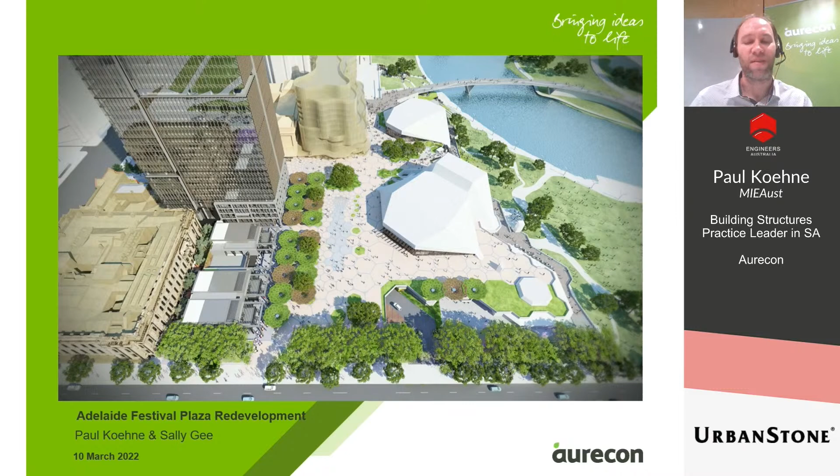So what are we going to cover today? The Aurecon presentation is split into two halves: the first being a project overview, and the second half being more engineering related, where we'll go into some of the specific details and challenges on the project.

I'll start with an overview of the wider Riverbank Precinct master planning, including some of the recently completed buildings, those under construction, and future buildings.

We'll then touch on the existing precinct conditions and talk about some of the complexities and intricacies of the precinct. After that, we'll touch on the architect's vision for the precinct. I would like to spend a bit of time looking at the precinct staging, including our innovative engineering-led design which enabled the vision of the precinct to be realised.

The second half will focus on some specific engineering-related project challenges, including existing structural conditions, strengthening of old structures, working with limited existing structural drawings, dealing with the multitude of unknown and latent conditions, and finally, how we overcame these to assist with the delivery of the overall master plan.

Adelaide's Riverbank Precinct lies immediately north of the Adelaide CBD. The location and character of this area is considered a critical element in the layout and makeup of the city of Adelaide. In particular, the Riverbank Precinct provides an important link between the city and its picturesque river environment.

The precinct is made up of several key precincts, including the Innovation Precinct, the Entertainment Precinct, the Health Precinct, Cultural Precinct, Waterfront Precinct, and the Sports Precinct to the north, which is home to Adelaide Oval and Memorial Drive. In 2011, ARM released the Riverbank Master Plan, which focused on the revitalisation of Adelaide's core Riverbank precinct.

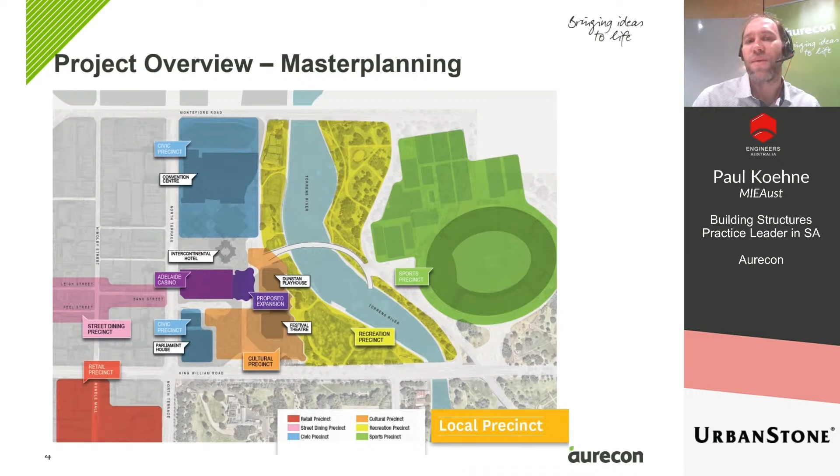For me personally, my journey in the precinct started in 2008 with SAHMRI, then straight onto the footbridge, and then to project leader for Sky City Casino and the Adelaide Festival Plaza redevelopment.

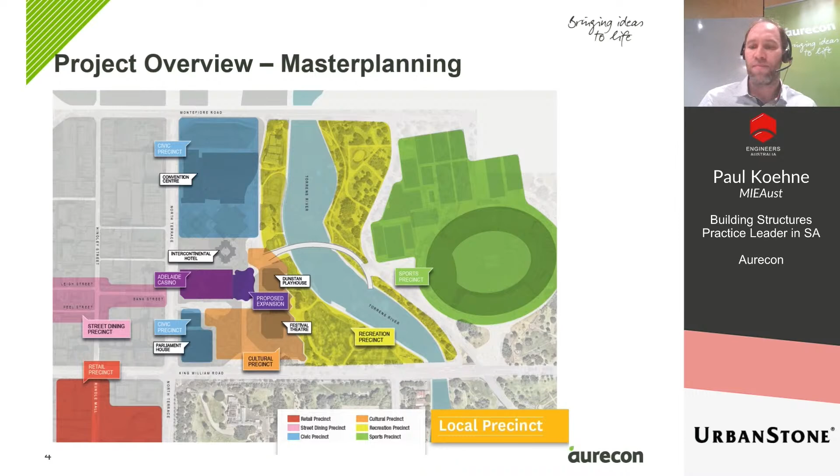It's home to some of Adelaide's most significant buildings, including the Adelaide Railway Station, Parliament House, and Adelaide Festival Centre. The existing plaza surrounding these buildings is considered old and dated, dilapidated, leaks like a sieve, and is mostly an unused, desolate area. The existing site is also home to several major loading docks, including Adelaide Convention Centre, Sky City Casino, commercial tenancies within the railway station, Intercontinental Hotel, Festival Plaza, and the Dunstan Playhouse.

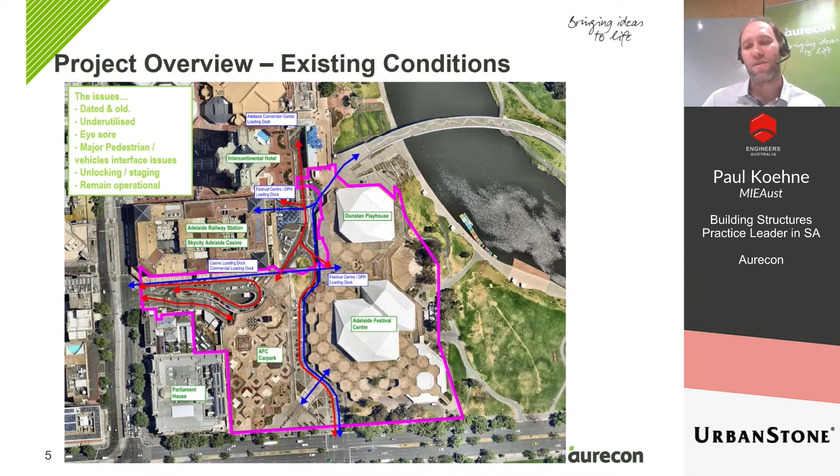You can see them highlighted in the green text. I haven't shown them all, but the red lines show some of the key traffic movements, and the blue lines show the key pedestrian movements. What's important to note is that the blue and red lines are intertwined, which is demonstrating the unfavourable, unsightly and unsafe constant interaction between road users and pedestrians.

I touched on this on the previous slide. Since construction of the Adelaide Railway Station in the 1920s, Adelaide Festival Centre in the 70s, and ASER in the 80s, this area has been constantly plagued with non-stop conflicts between road users and pedestrians. It's hard to create a pedestrian-friendly, thriving hub when a vast area of the plaza is covered with unsightly asphalt roads and loading docks.

To give an example, the Riverbank footbridge opened in 2014 and is a major pedestrian connection between the Adelaide CBD and the northern banks of the Torrens River, home of the Adelaide Oval and Memorial Drive. Yet to access the city or the railway station, pedestrians have to walk straight through the Intercontinental Hotel loading dock. During major events at the Oval, when up to 60,000 patrons will walk across the bridge, Festival Drive is closed from road users. What this means is all loading docks and car parks are completely cut off and inaccessible for up to 5 hours at a time.

This is clearly not a functional long-term solution. Similar issues were occurring throughout the precinct, including Sky City's casino main entrance, which is also used as a temporary and valet parking as well as a pedestrian thoroughfare. Similarly, again, the front door to the world-renowned Adelaide Festival Centre was accessed by crossing a road that was frequently trafficked by car and loading dock users.

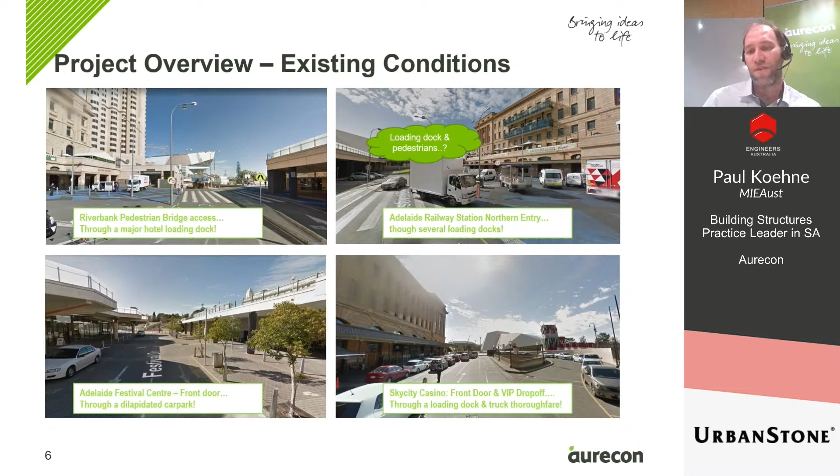We can go on forever, but you can start to get an appreciation for the precinct issues and the engineering challenges that we had to overcome.

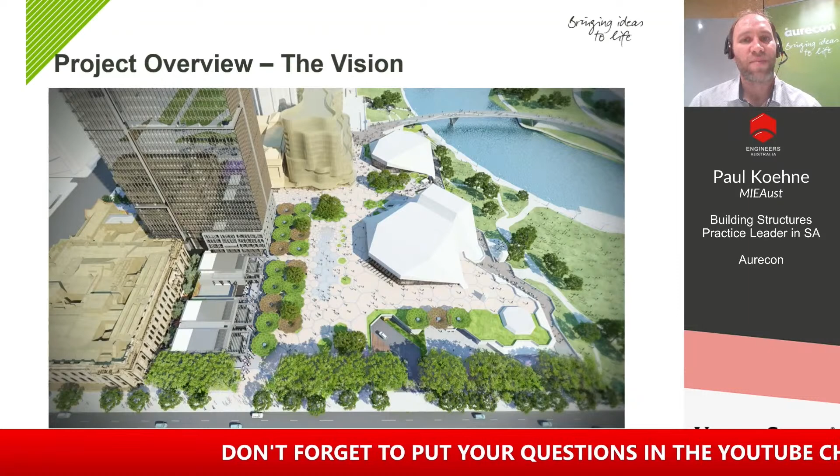So what was the vision? This image is courtesy of ARM as part of their early concept designs for Festival Plaza. I should caveat my summation of the vision with: I'm an engineer, not an architect.

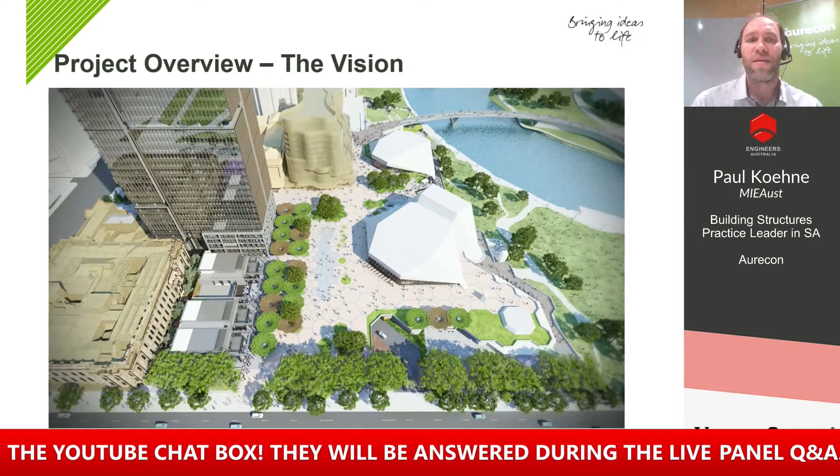The key vision is for a vibrant, thriving riverbank precinct, an area where people will not just pass, but will stop and congregate, a destination in itself. But people don't just stop for no reason. So the long-term vision included retail shops, shaded areas, seating places, interactive play areas and water features, and of course, direct access through to the picturesque Torrens River banks.

It must also be capable of hosting major events such as concerts, fringe shows, and New Year's Eve parties. As part of the project, the main entrance for the Dunstan Playhouse and Adelaide Festival Centre are also being raised to the upper level, with all road users and loading docks travelling below the plaza. This vision also therefore provided separation between road users and the public.

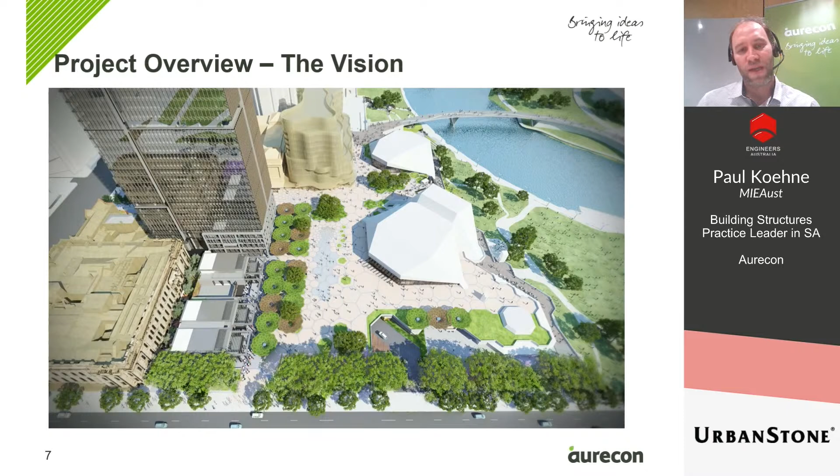So let's get into detail. The following pages are the staging plans for the Adelaide Festival Plaza redevelopment that was submitted as part of the 2015 development approval application. The first stage shown above was twofold.

Stage 1A is what was referred to as AFC Early Works or grade separation. As the name suggests, it relates to the first and most critical stage of separating vehicles from pedestrians.

Stage 1B was focused on revamping the northern face of the Adelaide Festival Centre to provide the critical connectivity to the Torrens River, but most importantly, relocating entrances of the theatres to the northern promenade to enable construction on the southern side. I've intentionally referred to the first stage as unlocking the precinct, as completion of these works were paramount to enable all other works on site to commence.

The loading docks were typically accessed from south and east entry points, both of which needed to be temporarily or permanently closed. But we also couldn't shut down loading docks for 5 years during construction and cripple the precinct and the businesses within it, particularly when many of the loading docks operate 24/7, 365 days a year. And the precinct included Adelaide's largest public transport hub, which transports tens of thousands of commuters daily.

We needed a complex, innovative, and engineering-led solution that could convert access to the precinct and the loading docks to the west, while simultaneously maintaining uninterrupted access to the loading docks, enabling continuous pedestrian flow through the precinct, and creating grade separation between pedestrians and road users.

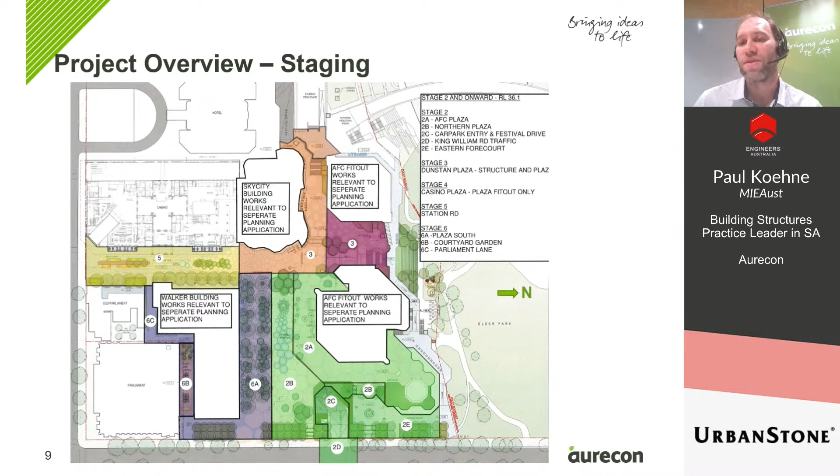Stage 2A, Stage 2B and 6A represent new plaza that was constructed concurrently with and above the Walker structure. So how did we do Stage 1?

The Intercontinental Hotel loading dock needed to stay in its current position, and so did the northern entry to the Adelaide Railway Station. So we came up with the idea of constructing a new basement adjacent to the railway station and within the railway station itself.

The basement had to be partly constructed within the railway station for two reasons. Firstly, so that we did not impact the long-term operations of the Intercontinental Hotel, and secondly, so that we could maintain continuous thoroughfare for pedestrians exiting the railway station into the Riverbank Precinct.

The idea was not originally supported, but there wasn't many options, and through clever engineering and carefully considered construction sequencing, we were able to demonstrate to DIT, the stakeholders and the builders that this was possible. There was also a very stringent dilapidation survey undertaken prior to commencement of works and strict ongoing survey monitoring to ensure that the existing heritage structures were not damaged during construction.

We also had to negotiate with the Adelaide Convention Centre to allow the Intercontinental Hotel to temporarily share their loading dock for 12 months and create a pathway through the ICH loading plant room for safe, clean and hygienic transfer of the Intercontinental Hotel goods and services.

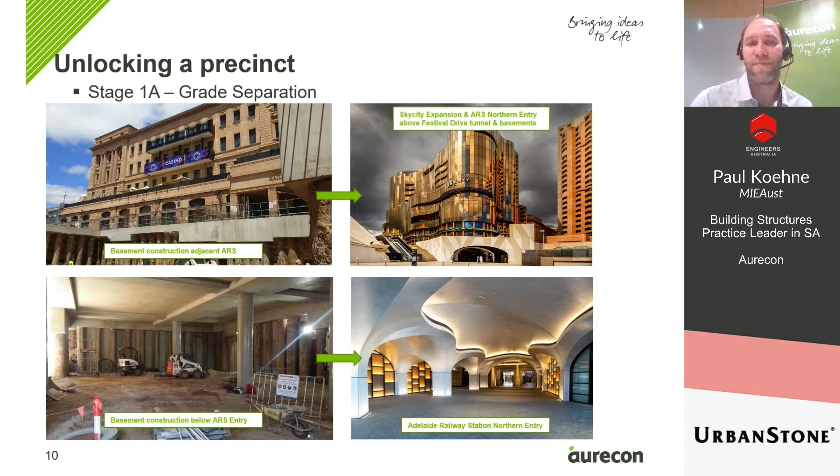Thanks, Paul. As Paul mentioned previously, the aspiration for the project was for a vibrant, thriving riverbank precinct, an area where people would not just pass through but stop and congregate, a destination in itself. It was also to be capable of hosting major events such as concerts, fringe shows, and New Year's Eve parties.

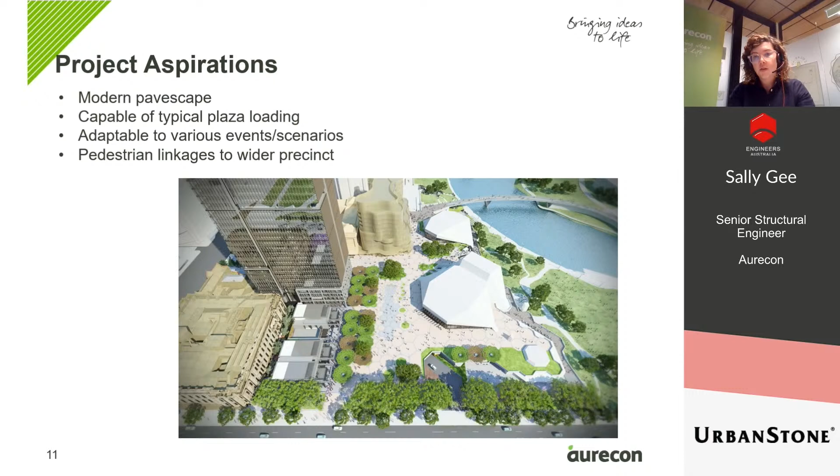Aspiration, coupled with an existing nearly 50-year-old ageing structure, came with significant challenges, as you can imagine. In effect, we were trying to take this and make it into this.

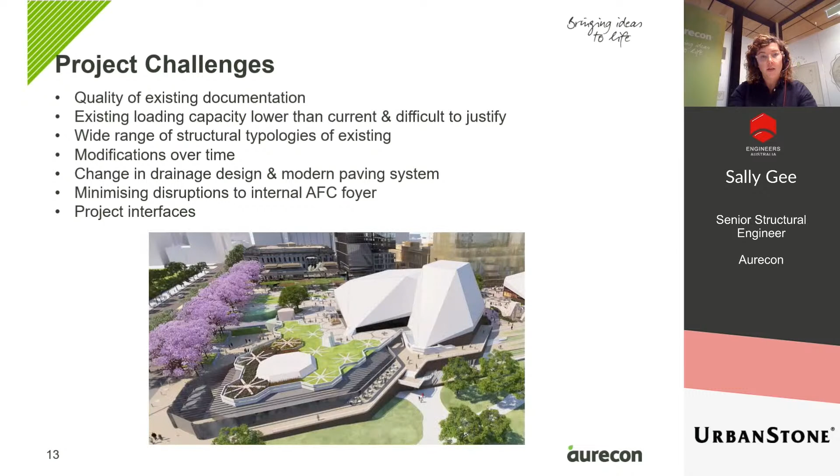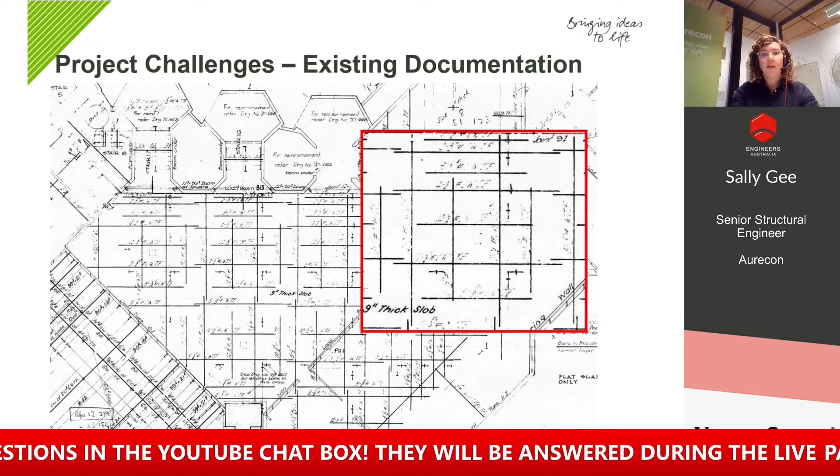One of the first and ongoing challenges was the level of existing documentation available to us. These were the original structural drawings for the project. We had access to those, however they were scattered, scanned from microfilm, incomplete, and to varying degrees of readability. In addition, there had been several modifications to the structure over the years which were not well documented.

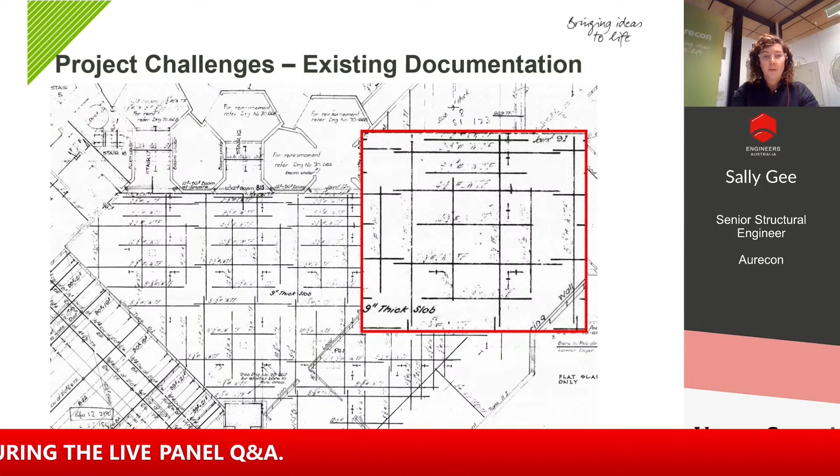So we combated this in several ways. Firstly, we got very good at deciphering little black blobs into marks, which could be 3/8-inch rebar marks and similar. We also used our extensive knowledge of the site to understand where modifications had occurred from the original documentation.

We used a series of historical reinforcement guides and engaged Adelaide University to undertake material testing on both the concrete and the reinforcement to validate our assumptions. And we did what all engineers do in these situations, which was make appropriately conservative engineering judgments based on the information we had to hand.

This is just a snapshot to show the level of documentation we were dealing with in many instances. You can see the text is very unclear, and it was quite hard to decipher what the reinforcement was in many locations.

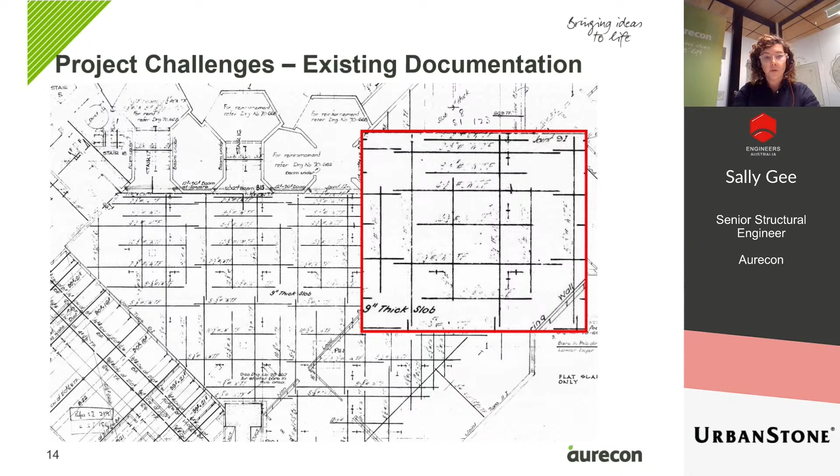Unlike lots of projects of this nature, we did actually have an original loading diagram for the plaza, which stated a loading equivalent to 3.83 kPa. The drawing doesn't stipulate whether this is dead or live loading, but it's also much lower than a modern plaza would be designed for these days, which at a minimum would be 5 kPa, and more likely 10 or more.

To allow for vehicles and event setup scenarios to occur, however, despite having the loading plan, we still needed to validate this, both to verify the loading against the structural drawings we had and also determine whether we could justify a higher loading. Even without the live load, there was still a significant superimposed dead load being proposed to account for the modern Pavescape design, including the paving build-up itself, which alone was 2 to 2.5 kPa, as well as extensive landscaping, seating, shading devices, lighting, etc.

Upon detailed analysis of the various structural elements making up the plaza, which I'll go into more detail shortly, it became clear that in several areas we couldn't even justify the existing structure for the documented live loading, let alone higher, or the 100 to 200% increase in the superimposed dead load from the original plaza.

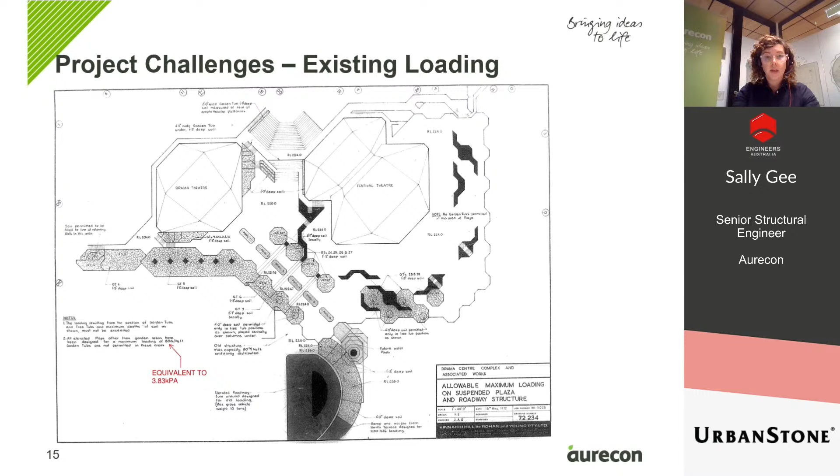To take a step back, I want to walk through the sheer number of different structural types we needed to analyse and determine the existing capacity for. Here you can see the extent of the existing structural elements being retained as part of the new plaza.

We had an array of different structural types, including long-spanning two-way waffle slabs, with two-way spanning beams of up to 15 to 18 metres long in each direction at approximately 3 metre spacing, with thin 100mm slabs in between.

There was a section of long-spanning steel composite slab with beams spanning approximately 24 metres. This slab was located over the Space Theatre in the Dunstan Playhouse and is a two-layered structure, as you can see in the snapshot, allowing for acoustic isolation between the structure and the surrounding elements for that theatre space below.

There were areas with thin 100mm to 130mm thick slabs over closely spaced, long-spanning, passively reinforced concrete beams up to 18 metres long. Each beam was individually reinforced with bespoke bar curtailments and stirrup arrangements, meaning each had to be assessed separately. There was no ability for bulk batch analysis—each beam had to be assessed on a case-by-case basis.

There were areas with thin slabs over internal load-bearing blockwork walls, and these were perhaps the most modified spaces over time, with internal walls having been demolished and replaced with either walls in slightly different positions or load-bearing beams and columns, which we needed to verify on site.

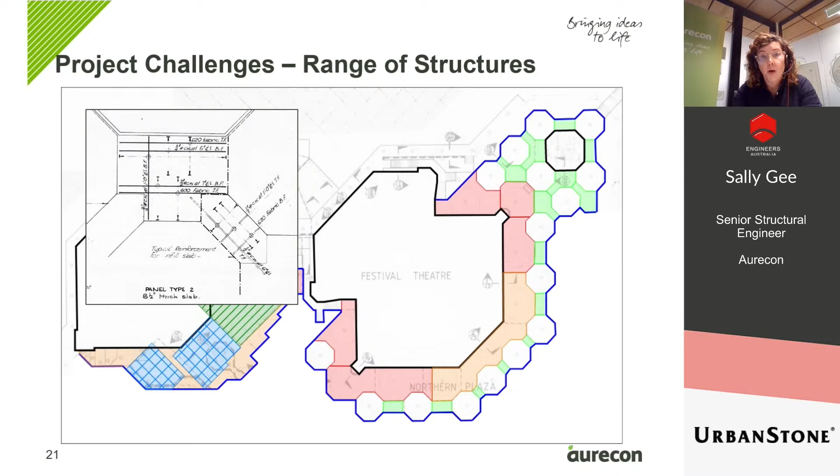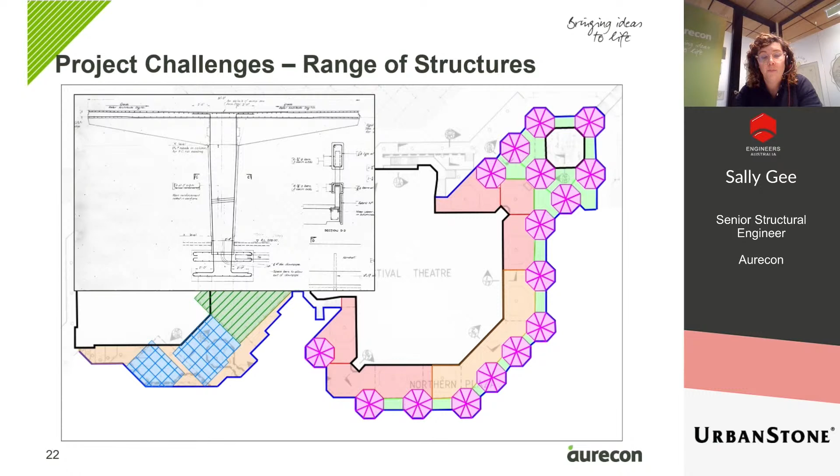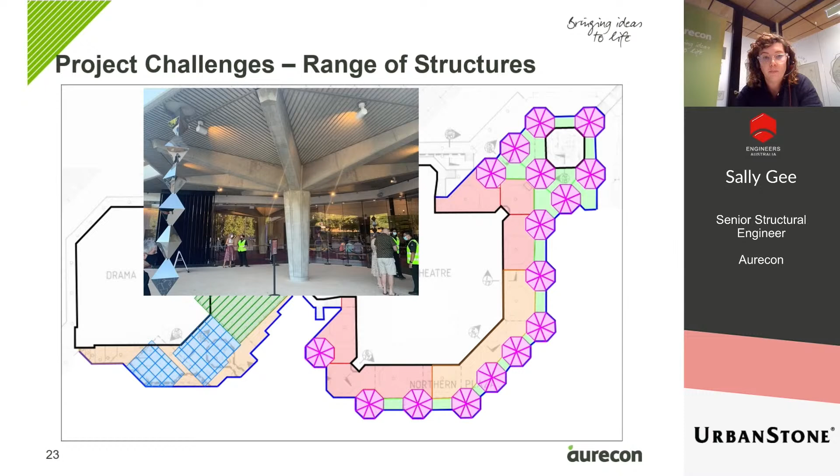There were areas of infill precast slabs, of which there were 3 or 4 different types with various spanning arrangements to consider. Perhaps the most unique structure on the site is the umbrellas—standalone octagonal structures with a single precast column and radial tapering precast beams, all tied together with an in situ concrete slab. They are quite unique, and it's impressive that engineers back in the 60s and 70s designed these from scratch without the computer analysis techniques we have today.

Once we'd established the baseline loading capacity for the various plaza elements, we went to work on how we might strengthen the plaza for the current design. The new plaza had a fundamental change in drainage design from a pervious top layer of precast biscuit pavers, 60 to 80mm thick, on concrete stools, allowing water to drain through the pavers.

Under these pavers there were slabs either screeded or constructed to falls, and it was changing to a modern surface-draining direct-stick pavement system. This meant the plaza had to accommodate a full paver bedding build-up, including screed for drainage to falls, paver depth, mortar and bedding, waterproofing, and whatever strengthening we needed to put in.

Due to the existing door thresholds, all this had to be achieved within the existing levels on the site. The key challenges were accommodating the additional superimposed dead load—100 to 200% of the original paving system—while maintaining the existing threshold levels.

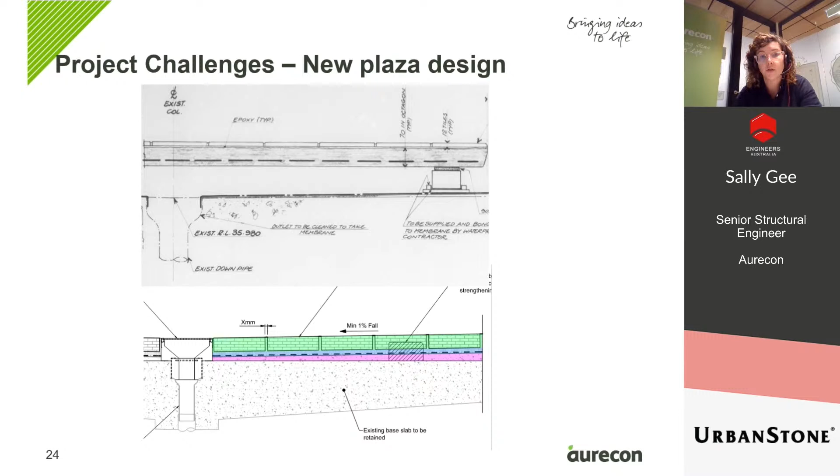This precluded some types of strengthening, including bonded topping slabs in many locations due to the levels. There was also the added difficulty of the majority of external areas being open foyer or performance spaces internally below, limiting options for new vertical structure beneath to help strengthen.

All these factors led us to the current strengthening design, which is bespoke to each of the structures beneath, but primarily comprises a combination of bonded topping slabs where levels allow, topping slabs on small upstand hobs, surface-bonded carbon fibre strips to both the top surface and soffits, and some steel strengthening beams, although these were kept to an absolute minimum.

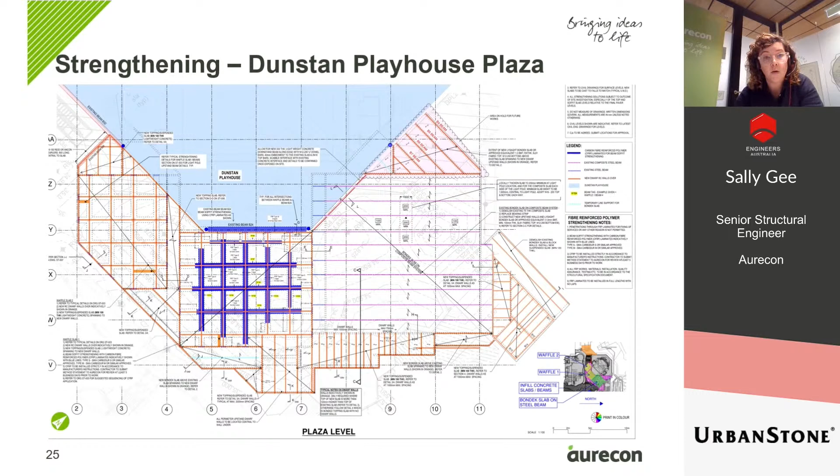You can see the extent of strengthening undertaken in these following slides. The one on screen here is the plaza out the front of the Dunstan Playhouse, where we had the long-spanning waffle slabs and the long-spanning acoustically isolated composite slab.

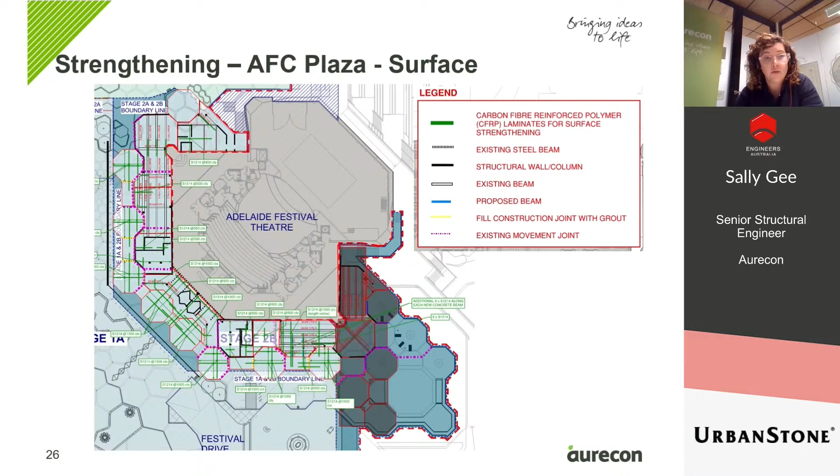And this is the AFC Plaza surface strengthening. You can see there's an array of different CFRP strips arranged around the site and to the soffit as well, which involved pulling down the ceilings within the AFC foyer.

To add complexity, all of this was undertaken concurrently with us completing a full re-waterproofing of the roof shells at the same time, with full scaffolding decks to hold the roof and the perimeter of the Festival Theatre shell, and finishing scope from the internal foyer fit-outs to enable those new Plaza entries into the AFC and Dunstan Playhouse, which Paul mentioned previously.

This work was started back in early 2017 and had been on hold for several years. During that period there was also a change in architecture team and other changes to the scope on site, and also in the midst of a global pandemic. So safe to say there were some challenges for the team along the way.

But this is where we've ended up, with a plaza that's capable of taking much more loading than previously, and supporting the modern Pavescape surface that you see there today.

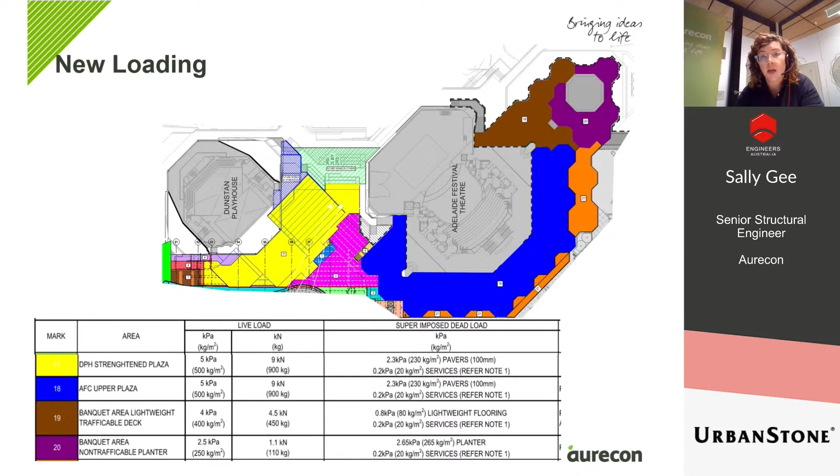Despite the challenges that were involved in this project and others where we're involved in the precinct, we're incredibly proud of the role we played in modernising this area of Adelaide and revamping this very important and iconic state asset.

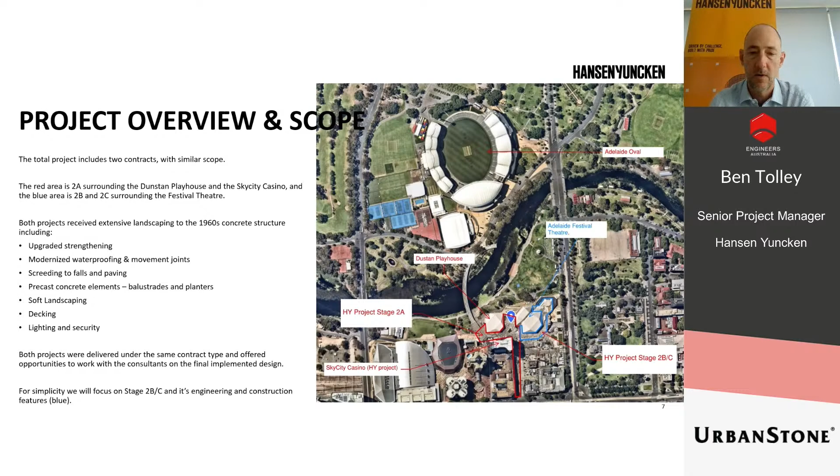To keep it simple, we're just going to talk about the area in blue. Very similar concepts, but this is a little bit more exciting from an engineering perspective because we're heavily involving carbon fibre strips.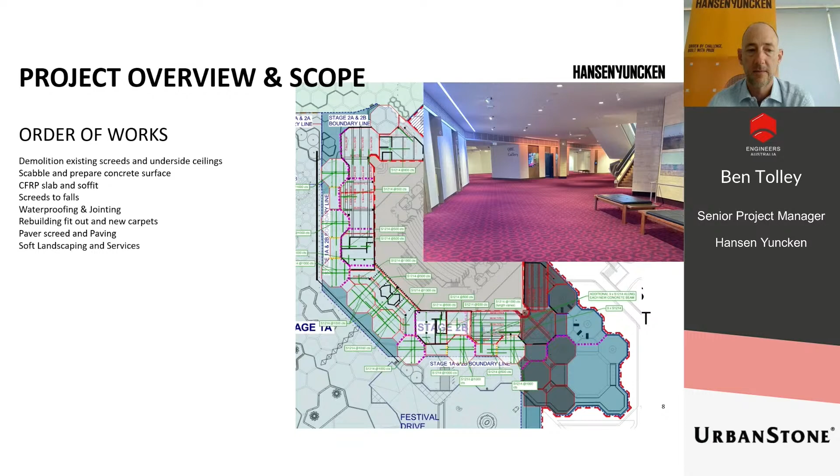Then we move on to the carbon fibre: we scabble and prepare the concrete surface, install the carbon fibre, screed to falls, waterproof and joint again, rebuild the fit-out after the waterproofing is done, install new carpets, and then continue the paving, screeding, soft landscaping, and services.

Working with the existing structure - this structure was built in the 1960s, and having spoken to people around the industry, everyone had a go at putting these slabs together, and it really wasn't the highest quality you'd expect, not like today's standards.

So when going through the demolition, the structure started to reveal itself. There were differing slab qualities throughout that needed repair, low reinforcement depths that again needed repair, and unknown beams.

The existing services - you can imagine a 1960s building with limited refurbishment throughout its time, and then we have to install carbon fibre to the soffit.

You can see there are some services left over. We removed a lot of those services, including much of the ductwork and fire services, put the carbon fibre up, then had to replace those services at a later date.

Extending on from the paving area, we had a lot of precast elements. Once you've done a lot of demolition, you cannot start or complete your shop drawings until all surveys are done, which meant the construction of our precast was quite late in the game because of those elements.

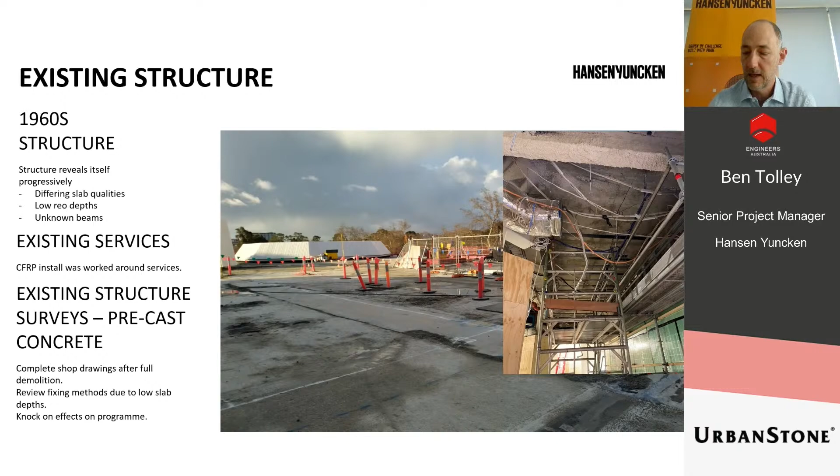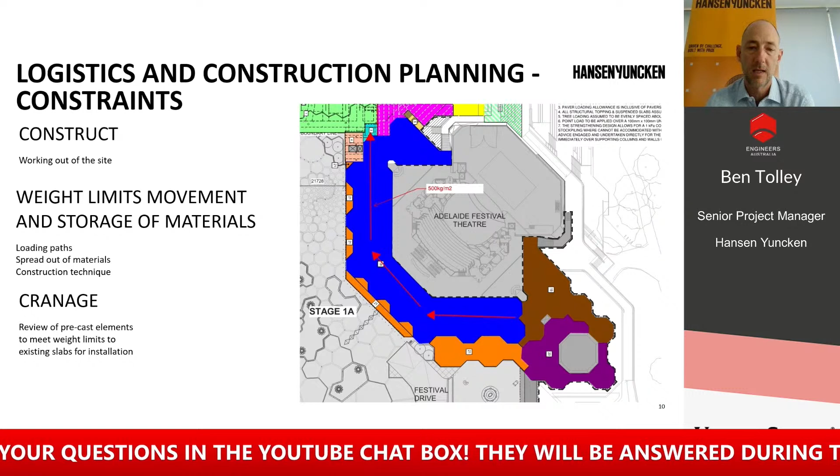Let's look at logistics and construction planning. Because of the short time frame we have here, like any other project, you need to maximise the amount of time you've got, so we really had to work carefully to ensure we could get out of the job as fast and efficiently as possible.

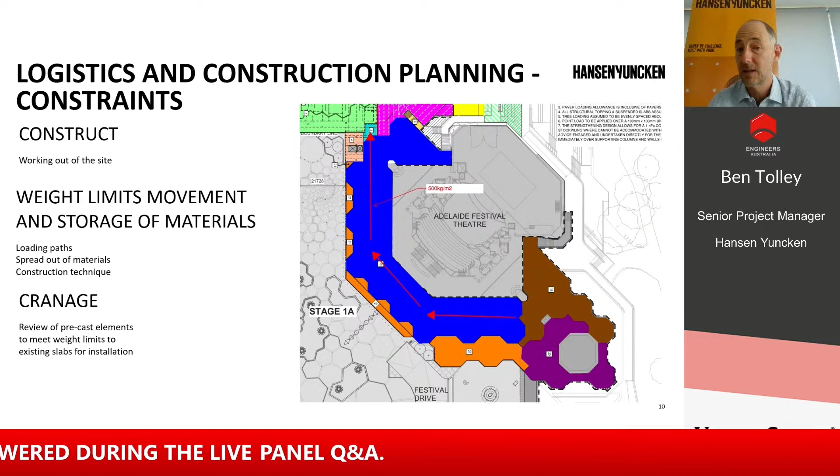Again, it's a 1960s slab, so the slab capacity was quite low - 500 kilograms per square metre, some areas down to 100 kilograms per square metre, very light. So we first look at where we're going to load materials in, from the light green area in the top left, then look at how we're going to build out of the job - following the red line from the bottom left heading to the top, we start from the back end of the job and work ourselves out.

Loading all those materials through that area is quite critical. You need to spread your loads out, limit the movement of materials, and make sure they're out of the way of people. You also need to make sure your demolition materials can get out at the same time, all whilst looking at that very low limit on the slab. Loading paths, spreading out of materials, and the construction technique are quite important.

Lastly, when you've got precast elements, you're working with existing structure. We had to change a lot of the precast elements to be smaller, so the size of the crane gets reduced and the size of the element gets reduced. So all those little things add up to a lot of time saving.

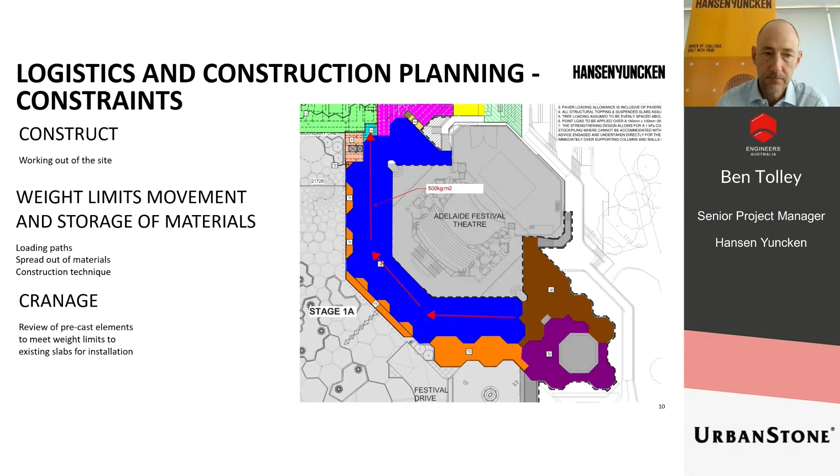Looking at the execution, you can see from the yellow lines on the left there's carbon fibre on the soffit and carbon fibre above on the top surface. If you look at the right-hand photograph, you can see a remnant of that beam I showed you before. We had to scabble the top of that, get it down to level, and then epoxy it.

The epoxy layer provides a nice flat surface because the carbon fibre can only bend so much. Once that's cured, you put another epoxy layer and then start laying up your carbon fibre. You can see from the grid pattern here, the carbon fibre is extensive. The slab was in poor condition, so you had to level the slab and then start that whole process.

Carbon fibre and the epoxy, mainly the epoxy, takes 7 days to cure. We prove that it's been cured and we've got the adhesion by an adhesion test. You can see that in the bottom photograph with a small piece of carbon fibre with a circle missing - that's our pull test.

From a construction perspective, we need to understand that we need to finish the carbon fibre on the top and underneath before we can go to the next stage, because we need to lift up the capacity of the slab to enable then the loading of the extra materials we're going to put on top.

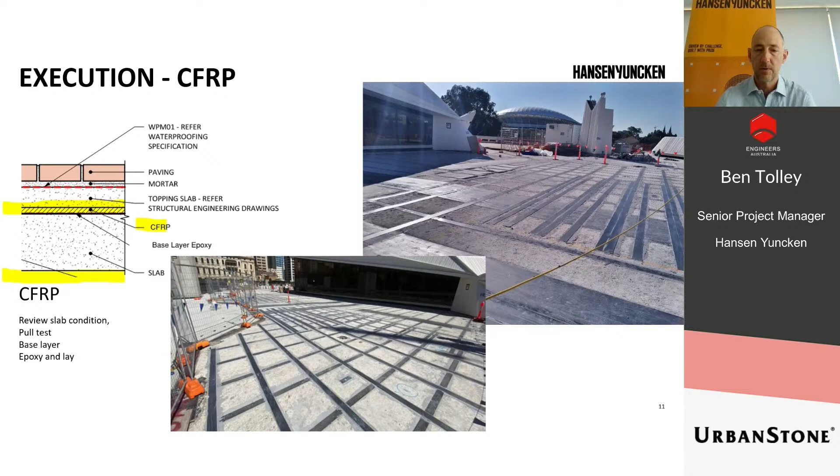So now we're starting to load up those materials. You can see here what you're doing is sand seeding the carbon fibre - that's the sandy looking material on the grid pattern, you see that? And then we're starting to screed, and then waterproof.

The screed that we have on this job is a Veloci product, very lightweight, meets the density requirements which are quite low on this project, and most importantly for us from a construction perspective, is really fast drying. We've managed to reduce drying times from another product to this product from 7 days down to 3 days. For us, that 3 to 4 day saving is massive over a large area, so that adds up to over a month's worth of saving in time.

On top of that, we've used the polyarc product, a specified product that we used on the previous stage that I showed before, the 2A. We replicated that in this project, and again, very fast drying - we can prime it and lay it within a 24-hour period. Once that second layer is dry, we can work on that within an hour. A lot of products around, you need to leave it to cure for a couple of days before you can go back on, so between those two products you've got a really good chance of finishing this whole project.

We have all those square metres to do, thousands of square metres to do, and only about 10 weeks to do it. So those sorts of small things, we spend a lot of time researching to enable that we can actually meet the program.

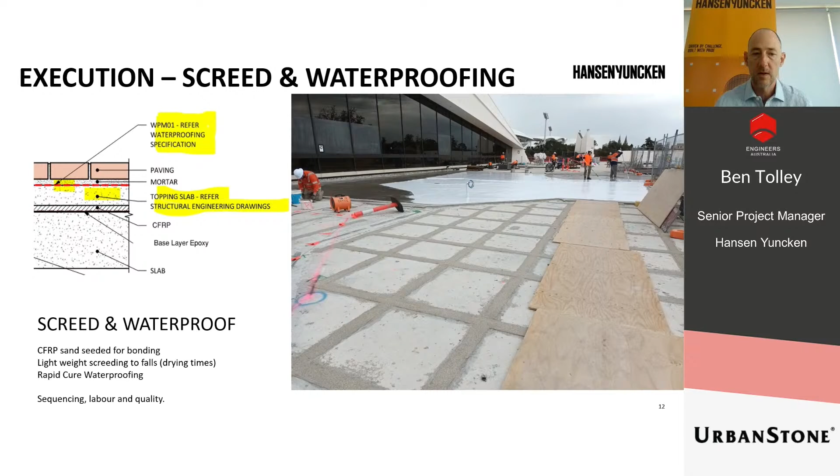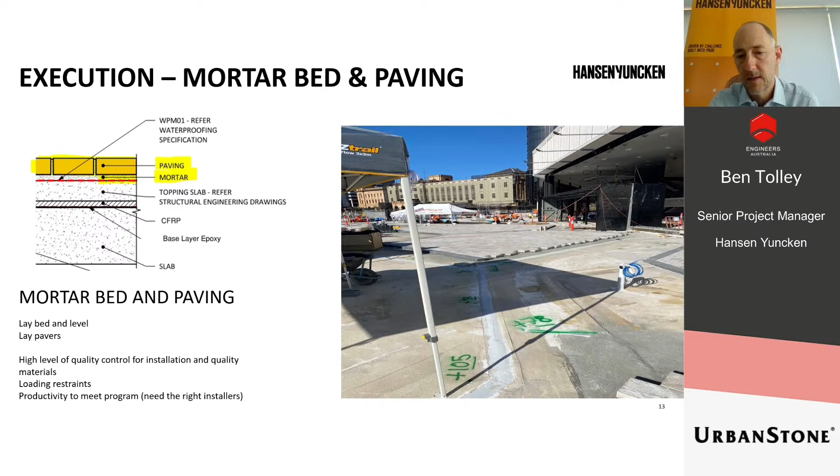But most importantly for this is the quality of the products you're using. That's a quality screed that was put down, but more importantly is the quality of the stonework that's been put down - these are solid pavers, 50 mil thick.

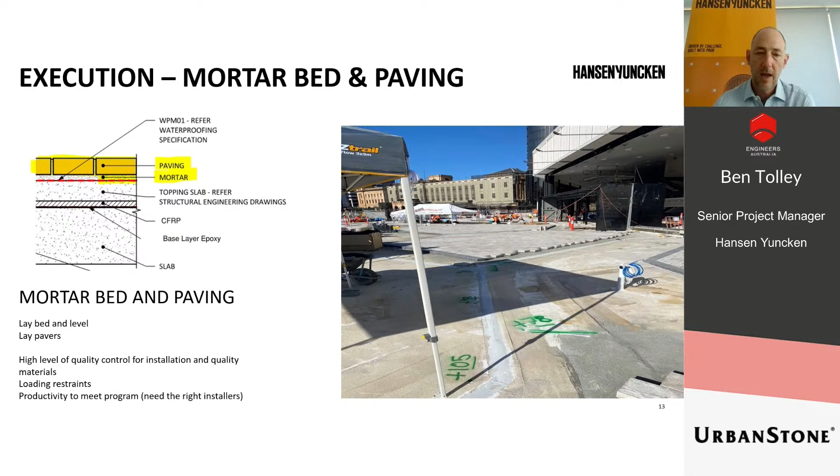They need to be even width, even depth. If you have any variation in those, you will definitely spend time sorting materials out, and then you'll be bringing other materials in, and you're going to have loss of time, loss of productivity, and it's going to slow the job down. Very important to have a high quality product. You'll see if you walk around, this is a high quality product, and it's gone down very quickly, producing the quality results people are after.

Now we look at the major challenges and actions on the project. For us, procurement of materials - this happened in particular due to the ECI phase when we're getting prices from the industry, and we started getting feedback that materials aren't available or hard to get. The industry is very busy, and also we're looking at COVID times, so deliveries are slow and inconsistent, and we're having shipping problems. All these things have to be looked at.

Two standout elements we had were the carbon fibre and the waterproofing materials. Carbon fibre was through Sika, and Hansen Yuncken, with great buying power and good relationships with contractors, were able to secure that carbon fibre on a boat coming over to Australia. Had we not purchased those materials ourselves, we would not have met the time frame of the program. There were other materials around, but they were not available to us - coming in on a boat, who knows where they were going. They could have been stuck in the Panama. We have no idea.

Secondly is the waterproofing material. We worked with our subcontractor to ensure that material was put to one side for this project, and we were able to keep that for ourselves. Should we have a delay, the material again was overseas - it's going to come by boat, you can't air freight it, it's highly volatile. So those two things together have been really essential for us to meet our program.